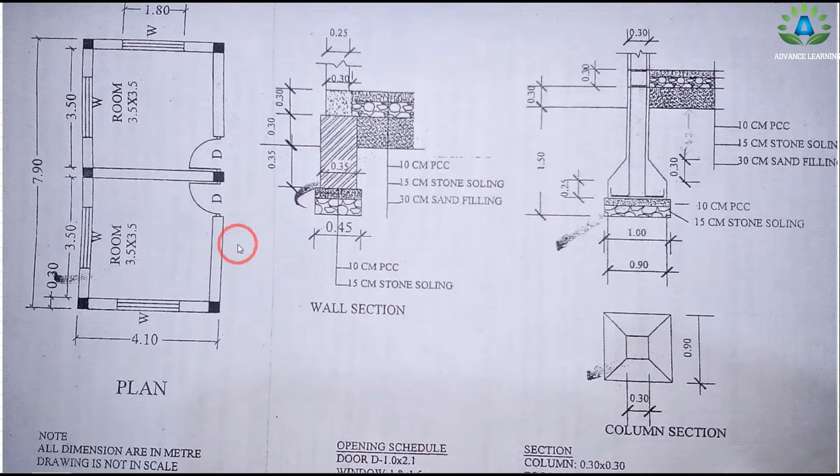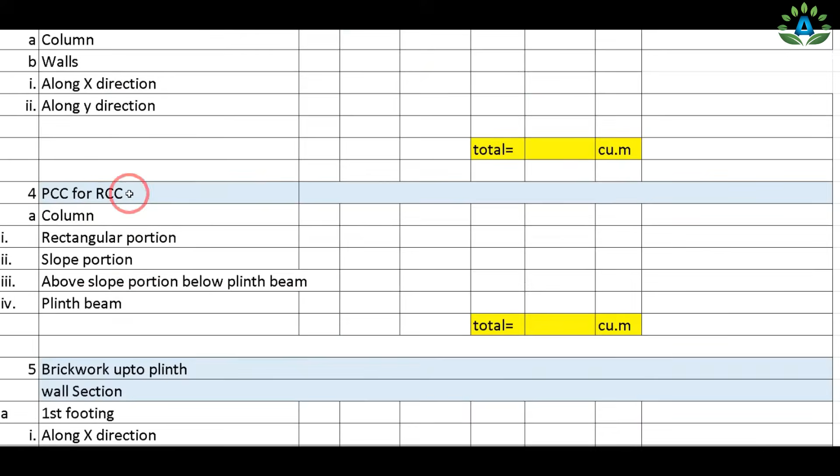And today we are going to calculate the following items: earthwork in excavation in the foundation, stone soling in the foundation, PCC for RCC, brickwork up to the plinth, and sand filling in the floor.

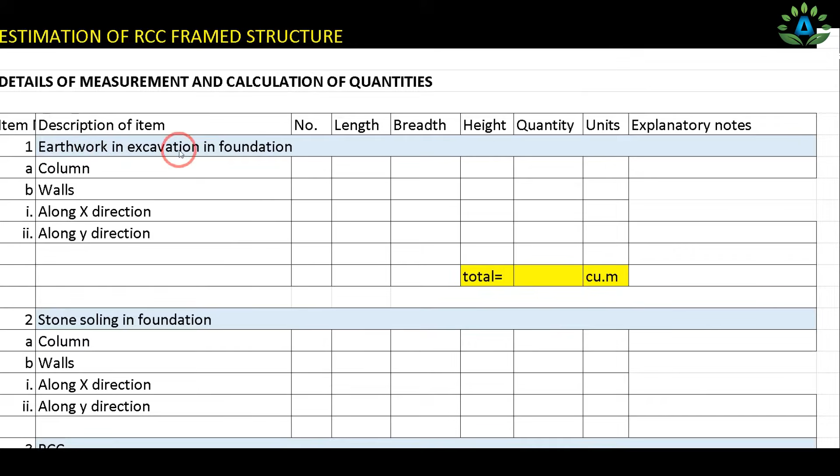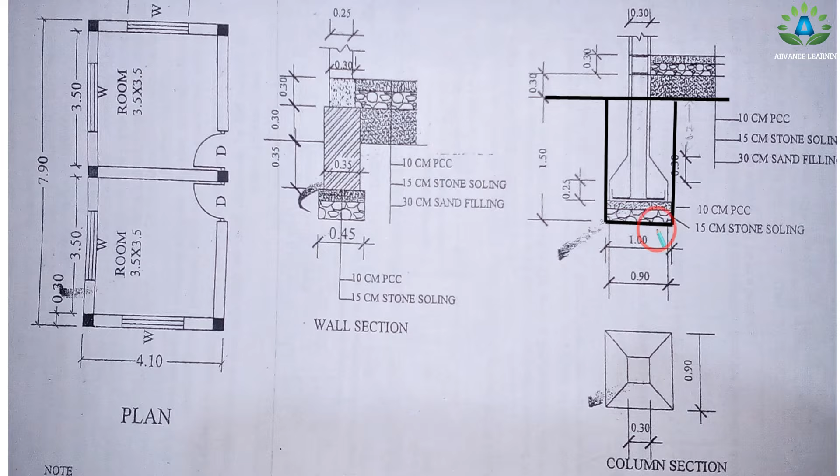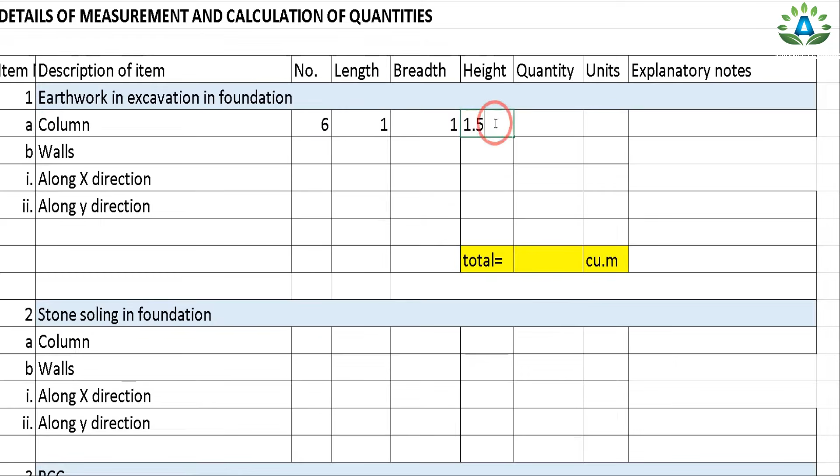So the first step is to calculate the earthwork in excavation in the foundation for the column. We need to see the plan. There are 6 number of these columns, and these columns are of width 1 meter, and we need to do the excavation up to the ground level. This is our ground level portion, and we have a total height of 1.5 meter up to the ground level. We need to do the excavation of 1 meter width. So the number is 6, the width is 1 meter and the length is also 1 meter, since it is a square column, and its height is 1.5 meter up to the ground level. So we have done the excavation of this 1 meter width column.

Now we need to do the excavation for the wall section. Our first step is to calculate the total center line between these two columns. We have a distance of 3.5 meter, and the column size is 0.3 meter. So the total center to center distance equals 3.5 plus 0.3 by 2, plus again 0.3 by 2, that equals 3.8 meter. Here also we will get 3.8 meter, but from this center to this center we will get a total center line of 4.1 minus 0.3 by 2, minus 0.3 by 2 again, that equals 3.8 meter.

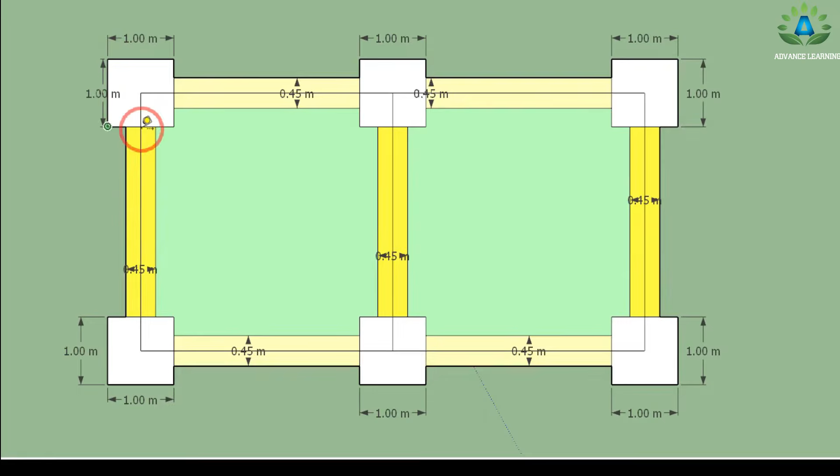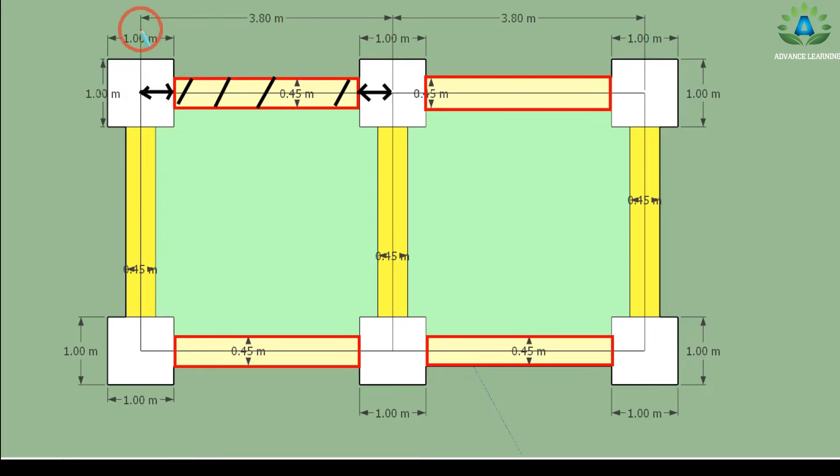Now we have already done the excavation for the column having width 1 meter and length 1 meter. So now we need to consider these walls, this wall, this wall and this wall. These walls are along the x direction, and we will consider the walls along the y direction in a separate topic. So firstly, this wall along the x direction. We have already calculated the total center line distance as 3.8 meter, but now we need to calculate the length from this side up to this side only. That is, in this center line of 3.8 meter we need to deduct this portion, that is half of this excavation width, 1 by 2, and again here also we have a width of 1 meter, and we need to deduct this small portion, that is deduct 2 number of 1 by 2, this portion and this portion.

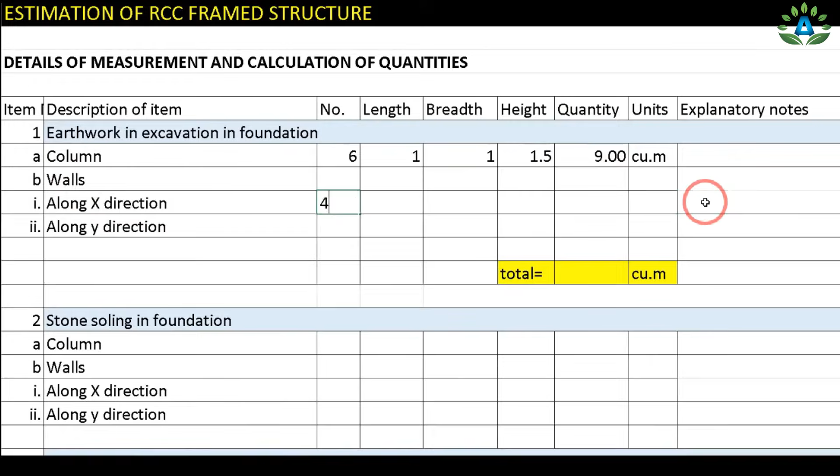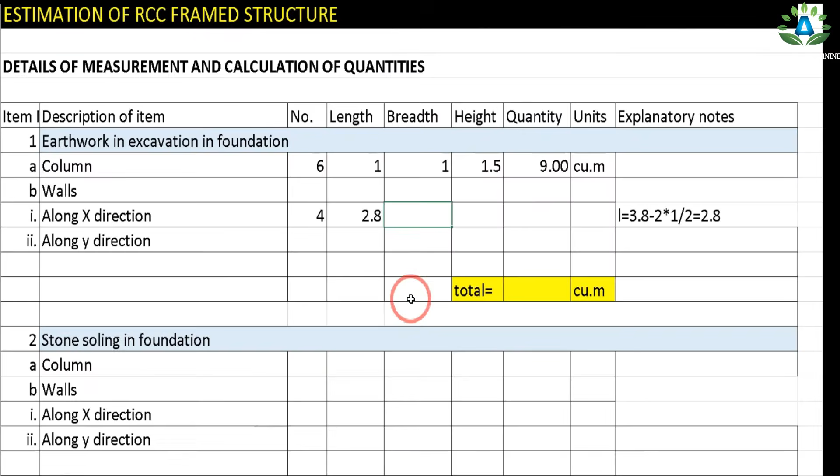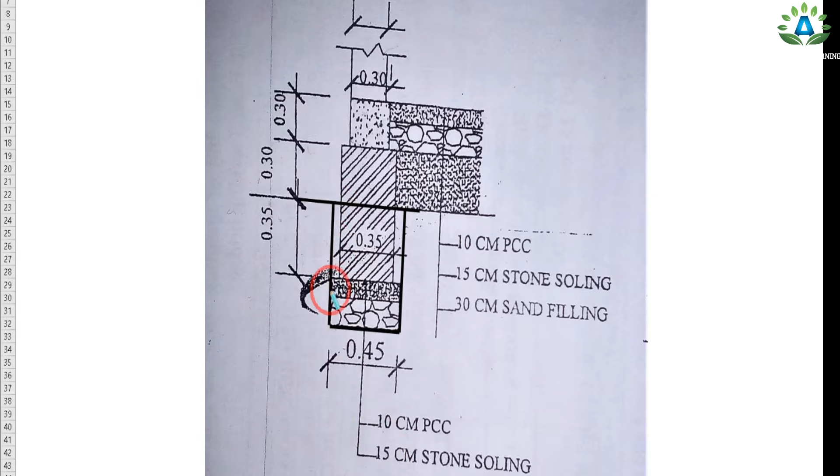We have 4 number of walls along the x direction having a width of 0.45 meter. For the walls along the x direction, the number equals 4, and its length equals the center line length, that is 3.8 meter. We need to deduct half of the foundation width of the column, 2 in number, so we will get 2.8 meter. So the length equals 2.8 meter, and the width equals 0.45. This is the section for the wall, so our width equals 0.45. The height of the excavation equals this portion plus this portion plus this portion, because this is our ground level, and the total height equals 0.35 plus this portion of 0.1 meter, and this portion of 0.15 meter. So the total height equals 0.6 meter.

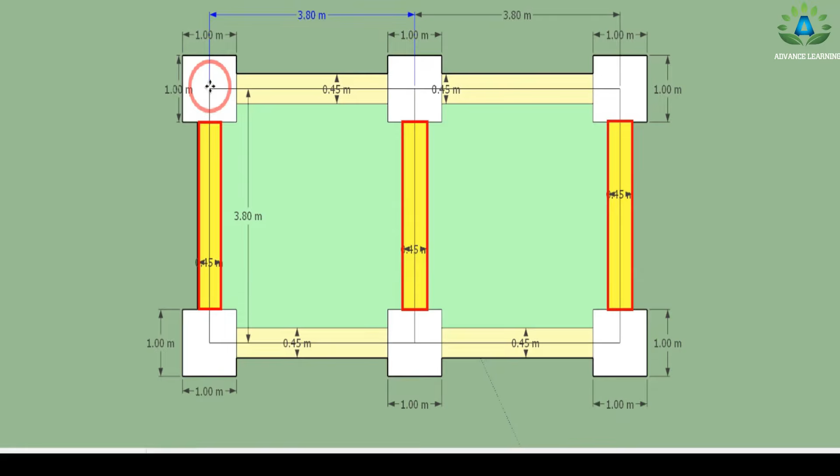Now we need to do the excavation for the wall along the y direction. In this y direction we have 3 number of walls having a width of 0.45, and we have already calculated the total center to center distance, that is 3.8 meter. In this center line length we need to deduct this portion, that is half of the width of this column, 1 by 2 from one side, and again deduct 1 by 2 from this side to get this portion length.

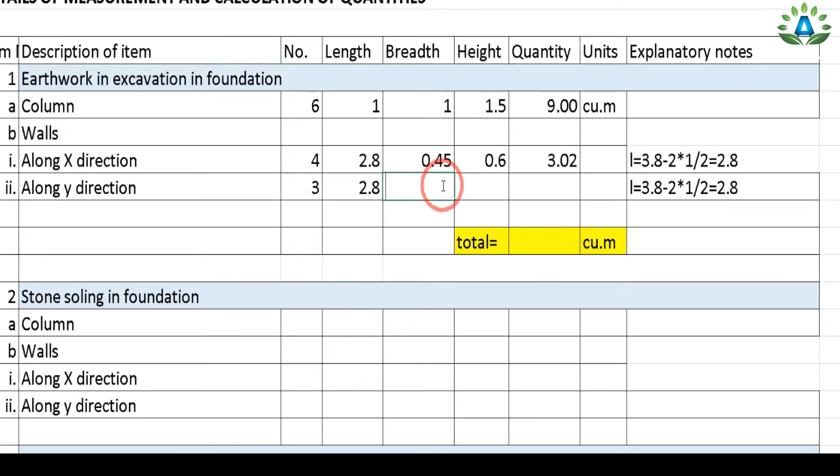Numbers are 3, having the length of center line length 3.8, minus we need to deduct 2 number of the column having the width of 1 by 2. So its length is equal to 2.8 meter, and it also has a width of 0.45, and the height is also the same, that is 0.6 meter.

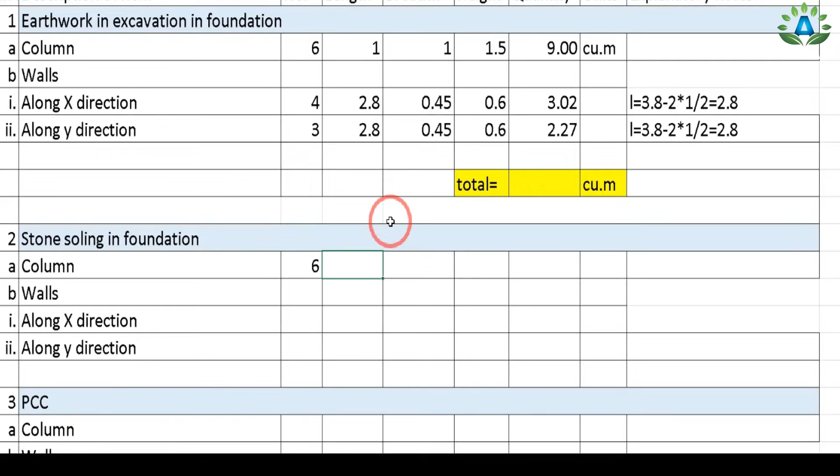Now we need to calculate the stone soling in the foundation, and always remember that we calculate the stone soling in meter square, so we don't write the height in the stone soling. So we have the stone soling in this portion, that is in 1 meter width. The columns number are same, that is 6 in number, and its length and breadth is same as above, that is the length of this column and the width is 1 meter.

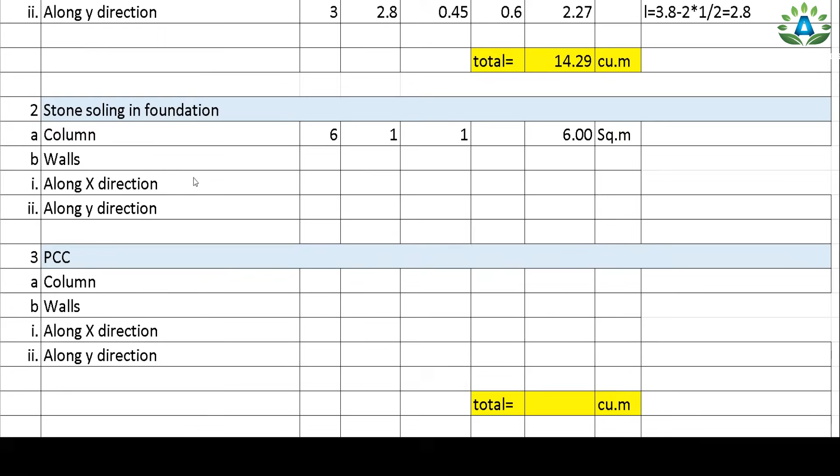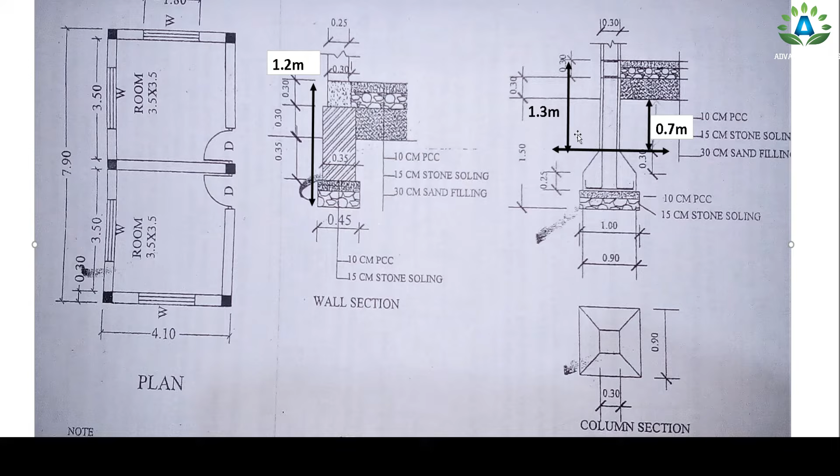So our next step is to calculate the stone soling in the foundation for the wall along the x and y direction, and for this we need to see our section. Here our stone soling is kept in this portion, that is 15 centimeter stone soling. This total height is equal to 1.2 meter from this plinth beam, that is 0.3 plus 0.3 plus 0.35, plus this small portion is 0.1 and this portion is 0.15 meter. So this height equals to 1.2 meter, and at the same height of 1.2 meter in this column, we will see that it has a width of 0.3 meter because this height is equal to 1.3 meter, and 1.2 meter will lie somewhere over here.

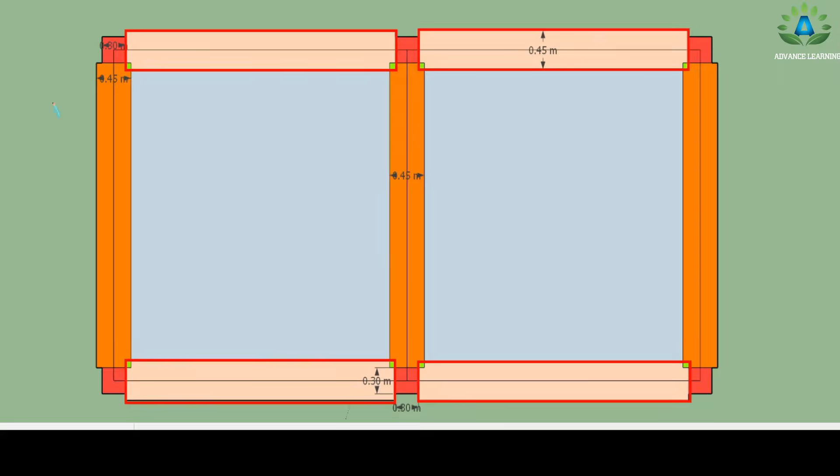So in this level it will have the width of 0.3 meter column. So our plan will look like this, that is in this column it will have 0.3 meter, whereas in this portion we will have 0.45 meter width. So our plan will look like this, and here we are going to calculate the x direction beam, that is this portion, this portion, this portion and this portion. So we have 4 number of these beams in x direction having the width of 0.45, but we need to calculate the length.

So here we have this center to center distance as 3.8 meter, and we need to deduct this half portion, that is 0.3/2 from one side and another 0.3 from one side. So our length is equal to 3.8 meter minus 2 number of the column having the width of 0.3/2, that is equal to 3.5 meter. So length is 3.5 and we don't need to write its height.

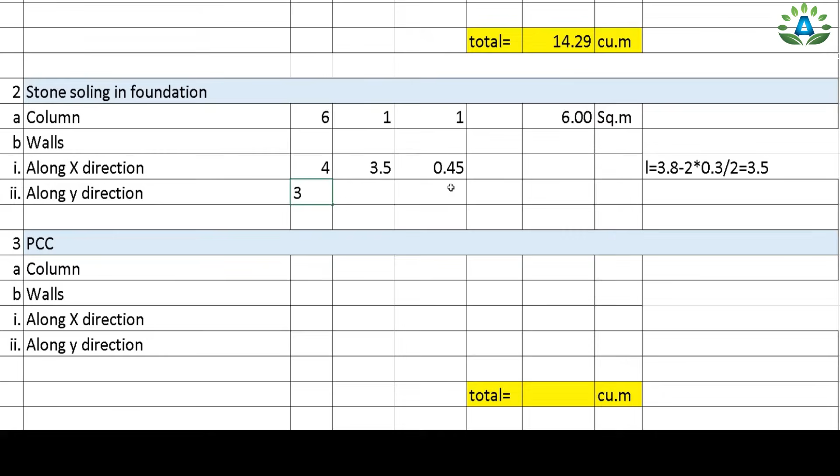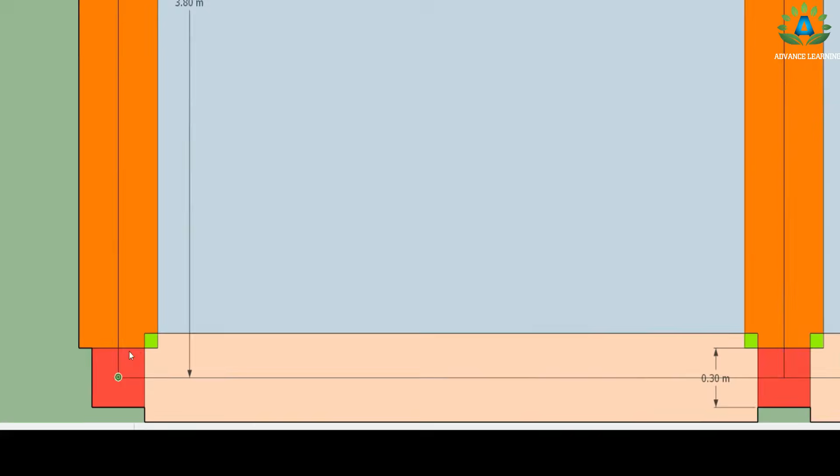Now we need to calculate the beam along the y direction. So here we have 3 number of these beams along the y direction, having the width of 0.45. So the number is 3 and width is 0.45, and we need to calculate its length. So here also the length will be the center to center distance, that is 3.8 minus 0.3/2 from this side and again minus 0.3 from this side. So the length will be equal to center line length 3.8 minus 2 into 0.3/2, that is equal to 3.5 meter, and no need to write its height.

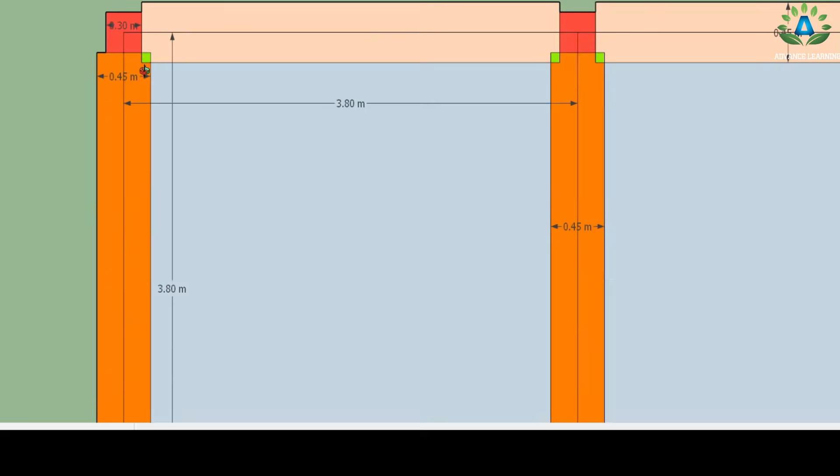So here we have done the soling in this portion, this portion, this portion and all these portions. But here we can see that this small portion is considered twice while doing the soling on this side as well as on this side. So we can see that the number of overlapped portions is 1, 2, 3, 4, 5, 6, 7 and 8. So the number of overlapped portions are 8, so they should be deducted.

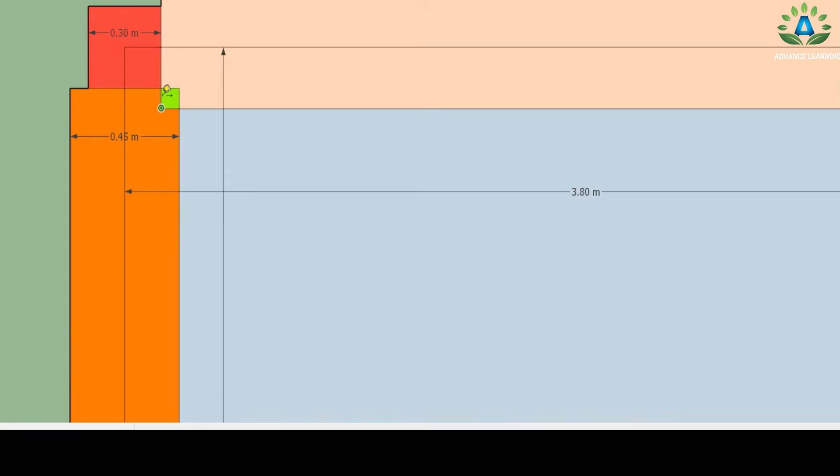And this length of this overlap portion is equal to 0.45 minus 0.3/2, that is equal to 0.075 from this side, and this width is also 0.075. So deduction is to be made, and number of deductions are 8 in number, and the length is equal to 0.075, that is 0.45 minus 0.3 meter wall by 2, and its width is also same, and no need to write its height. Now we need to do the PCC for these columns and the wall.

So we have 6 number of the column. PCC is done in this portion having the height of 0.1 meter and the width is 1 meter. So length and the breadth is 1 meter and its height is 0.1 meter.

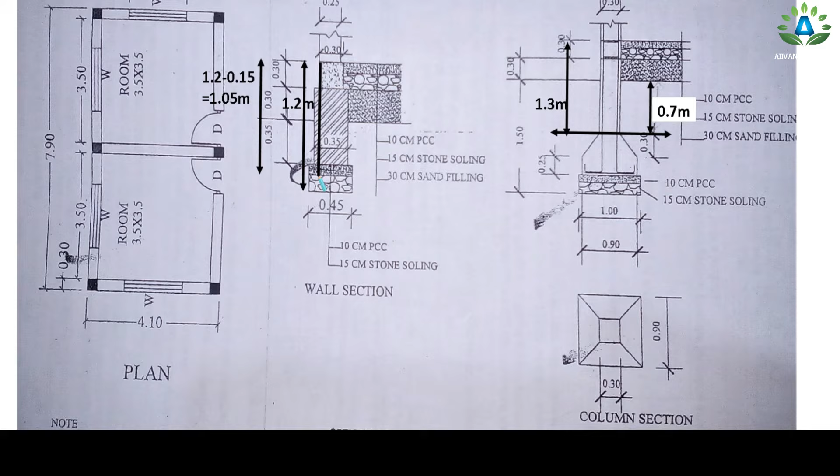Now we need to calculate the walls along the x direction. So here PCC is kept over this small portion having the height of 0.1 meter. So it means that our height from this portion up to this portion is 1.05 meter from this plinth beam, and at the same time we have this 1.05 meter somewhere over this portion, because this portion is 1.3 meter and 1.05 will lie somewhere over this portion.

So it means that for this column portion we have the width of 0.3 meter, whereas our wall section will have the width of 0.45 meter.

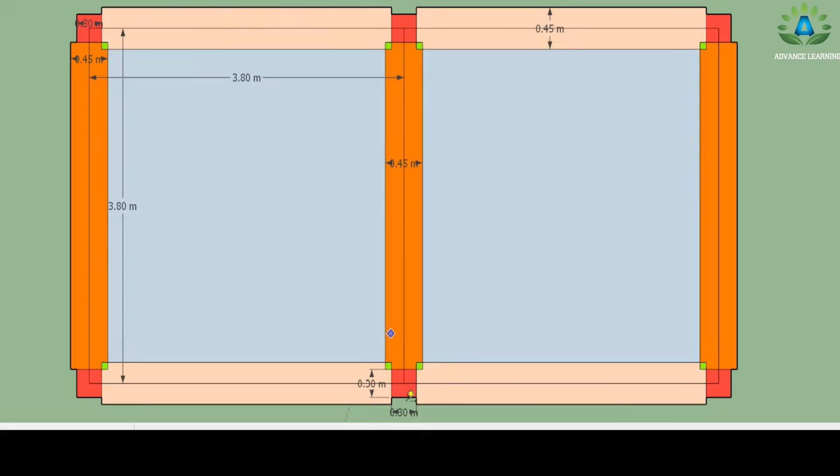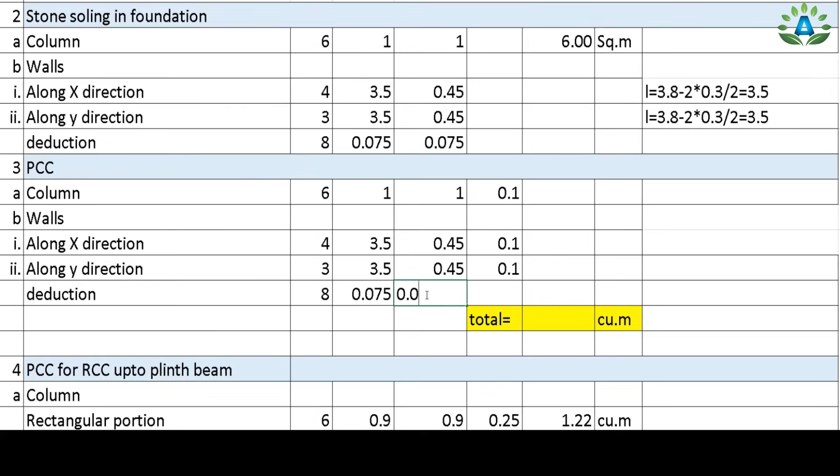Our plan will be the same as the soling portion: we need to deduct 8 number of these projections having a width of 0.075, with length and breadth also the same, only the height will be different. Since length and breadth can simply be copied, only the height differs. We have this PCC with a height of 0.1 meter for both, and we need to deduct 8 number of this overlapped portion having length of 0.075, width of 0.075, and height of 0.1 meter. Our next step is to calculate this PCC for the RCC up to the plinth beam.

Here is the section of the column, and we have this PCC for RCC in this portion. Here there is the reinforcement, and we do the PCC for this RCC portion. This portion is our plinth beam portion, that is 0.3 meter into 0.3 meter. We need to do the PCC for RCC for all these portions.

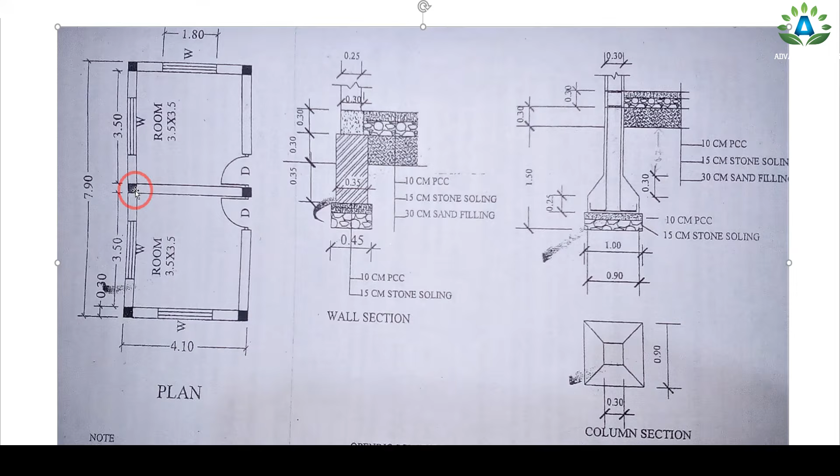Firstly, we have this rectangular portion, and above this there is a sloped portion, so we consider that as our slope portion. I've considered this as a rectangular portion for the column. We have these columns, 6 in number, with a length of 0.9 meter. Since it is a square column, the length and breadth are both 0.9 meter, and it has a height of 0.25 meter.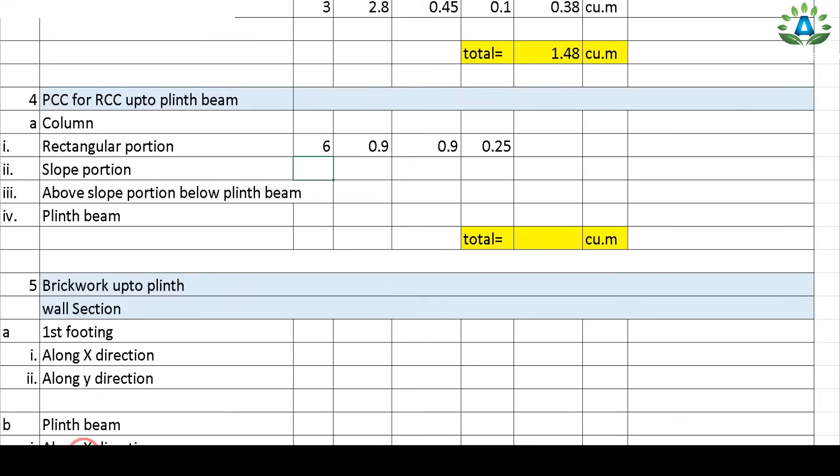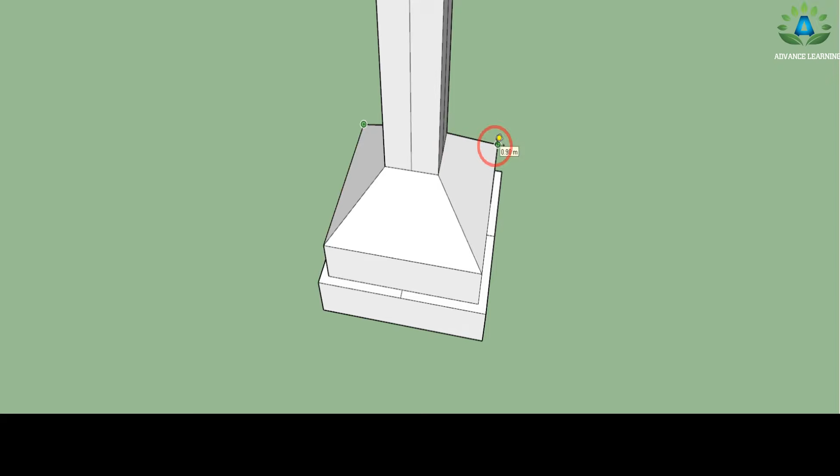Next is our slope portion, considering from this point up to this point. At the base it has length and breadth of 0.9 meter, whereas at the top it has length and breadth of 0.3 meter. I'll consider A1 for the bottom portion, that is 0.9 into 0.9, so the area for the bottom equals 0.81. Similarly, I'll consider A2, the area for the upper portion, which is 0.3 into 0.3, equal to 0.09.

For this area, I'll take the average of A1 and A2: 0.81 plus 0.09 divided by 2, since it's a slope portion. Now we need its height, because volume equals area into height. The height of the slope portion is 0.3 meter, so we multiply by 0.3. Since the column is 6 in number, this slope portion also has a number of 6, and we can easily calculate its quantity.

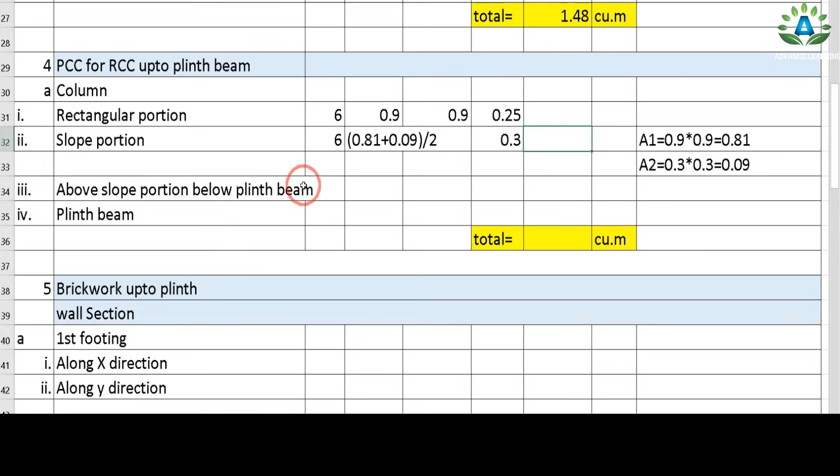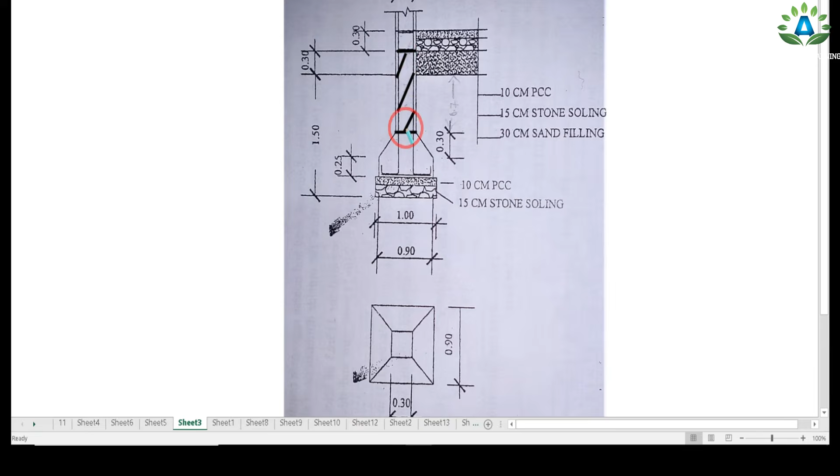Now I'll consider the portion above the slope and below the plinth beam, from this side up to this side. This is our plinth beam, and we're considering this portion, which has a width of 0.3 meter. Since it's a square column, length and breadth equal 0.3 meter, and we need to calculate its height. The total portion here is 0.3 and this is 1.5; we need to deduct 0.15 and 0.1, with this portion having a height of 0.25 and this portion 0.3.

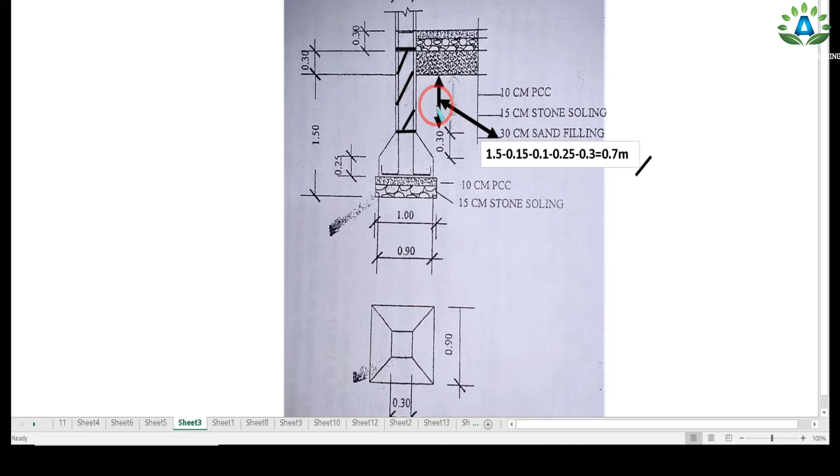We get the total height from this side to this side as 0.7 meter, but we need the total height from this side to this side. This portion has a height of 0.3 and this portion 0.7, so the total height equals 0.7 plus 0.3, which is 1 meter. So its height equals 1 meter, with 6 in number, and this portion has a width and length of 0.3 meter since it's a square column.

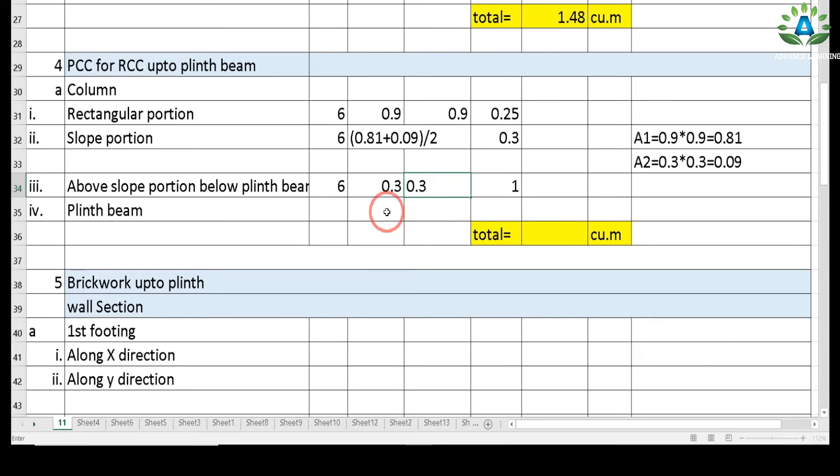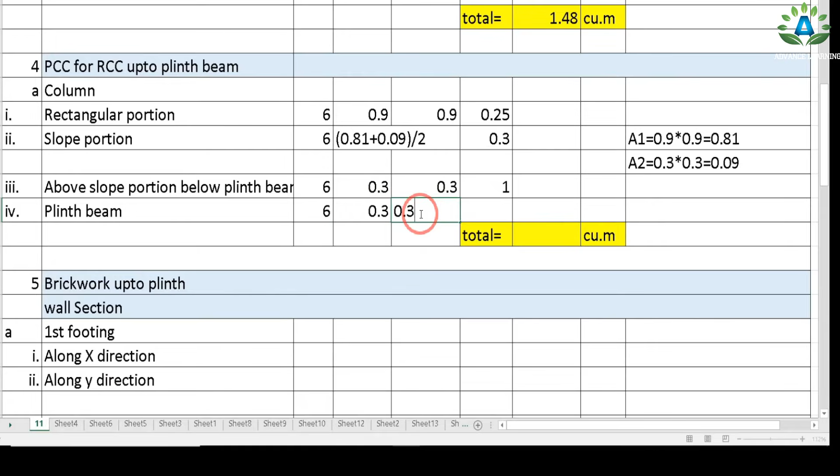Now we need to calculate this plinth beam portion, the small portion, which has a length of 0.3, width of 0.3, and height of 0.3 meter, with 6 number of columns. Our next step is to calculate the brickwork up to the plinth for the wall section.

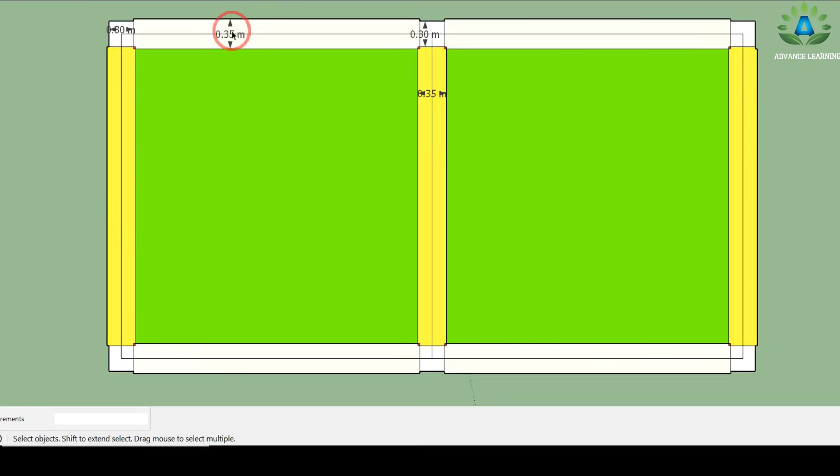So our plan will look like this: our column will have a width of 0.3 meter, whereas our beam portion will have a width of 0.35 meter. We don't need to do the brickwork for these column portions because we have already done the PCC for the RCC in this portion.

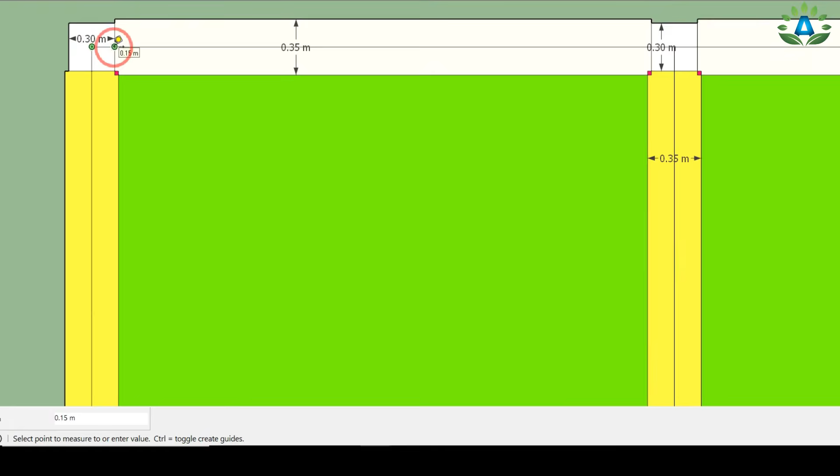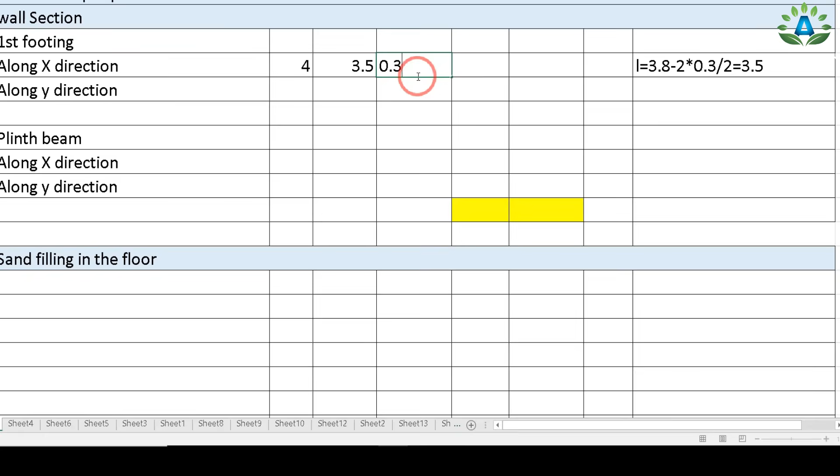So we are going to do the brickwork for the X and Y direction beams, starting with the X direction beam. We have already calculated the total center to center distance as 3.8 meter, and we need to deduct half portion, that is 0.3/2 from one side and another 0.3/2 from the other side. Along the X direction we have 4 of these beams, 2 here and 2 here, and the length equals center distance 3.8 meter minus 2 times the column width of 0.3/2, giving us 3.5 meter. Its width is 0.35 and height is 0.65.

Now we need to calculate the brickwork for the beams along the Y direction. We have 3 of these beams, and the length equals center to center distance, 3.8 meter, minus 2 times the column width of 0.3/2. So length equals 3.5 meter, width is the same as above, 0.35, and height is also 0.65. Now we need to do the deduction portions.

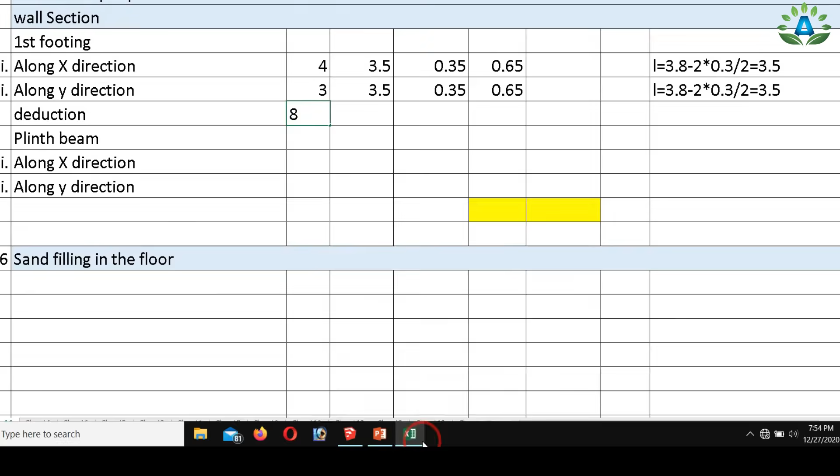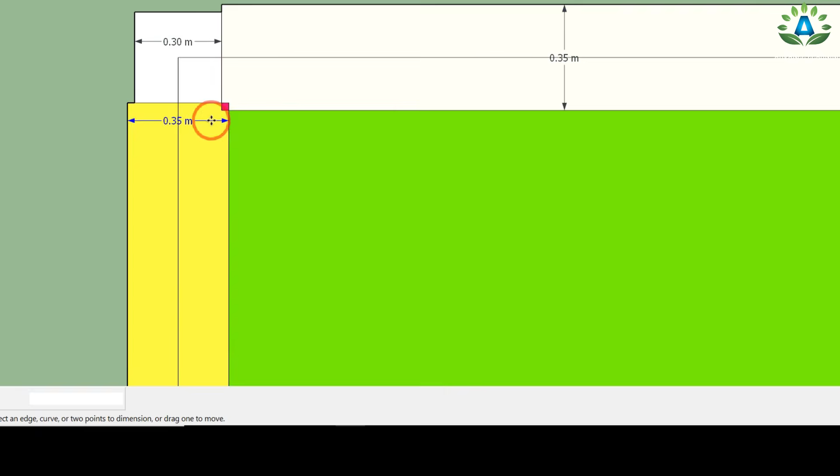We have 8 of these portions that should be deducted, so number equals 8. Now we need to calculate the length and breadth of the deductions. We have a width of 0.35 in this brickwork portion, whereas the column at this level has a width of 0.3, so we need to calculate the length of this overlap portion. This small portion is obviously 0.35 minus 0.3 divided by 2, which equals 0.025.

So the length is 0.025, the width is also 0.025, and the height is the same as above, 0.65 meter, and we need to deduct this portion. So here we have completed the brickwork in this portion.

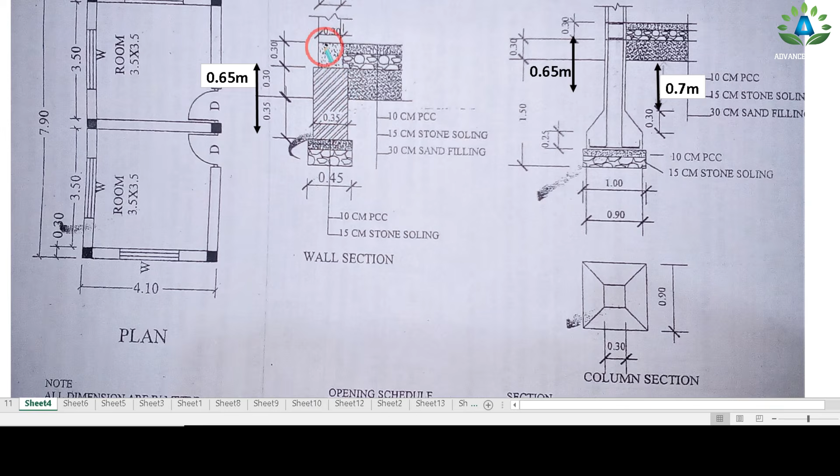Now we need to do the brickwork in this small plinth beam portion. Here we have a width of 0.3, and in this portion of the plinth beam of the column we also have a width of 0.3, so both are 0.3 meter. Its plan will be the same as the given plan, since both portions are 0.3 meter, so there is no overlapped portion, and we can easily calculate the length. This length is already given as 3.5 meter, with a width of 0.3 meter.

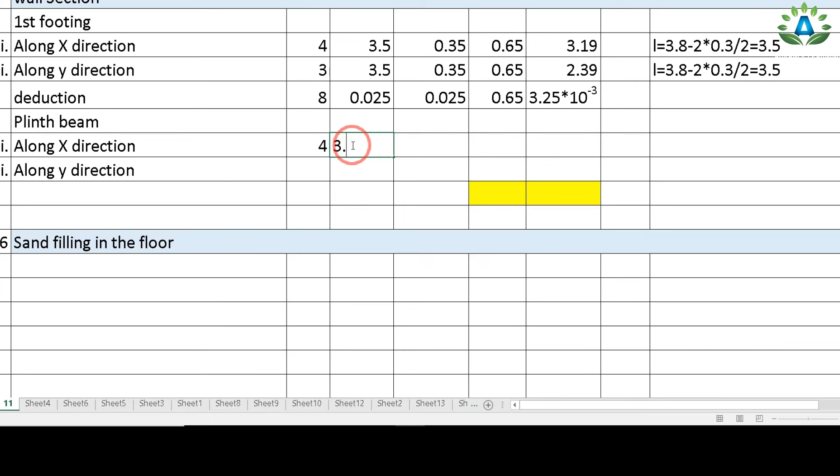In the X direction we have these beams, 4 in number. So for the plinth beam in X direction, the number equals 4, the length equals 3.5 meter, the width is 0.3 meter, and it has a height of 0.3 meter.

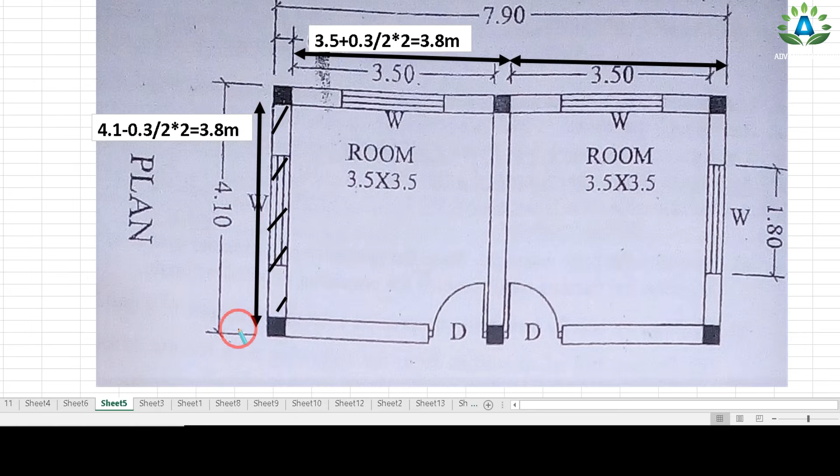Similarly in the Y direction we have 3 of these beams. So number equals 3, and its length equals the inner to inner portion, because we don't do the brickwork for those portions. The length equals the outer length 4.1 minus 2 times 0.3, giving 3.5 meter, with width also 0.3 and height also 0.3.

So our last step is to calculate the sand filling on the floor, and for this we need to see the section, since our sand filling is kept in these inner portions. First we need to see the section between these two portions. When we look at the section on this side, we get the section of the wall, and here also we get the section of the wall. We get this type of section on both sides of the room.

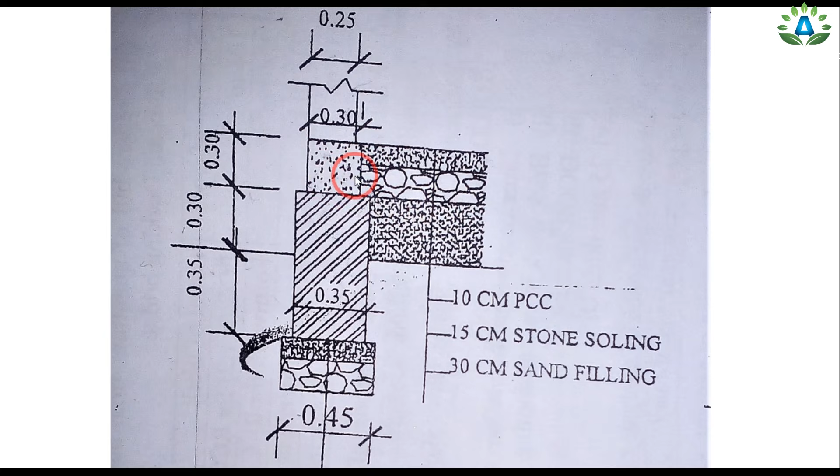So here I have made this type of section on both sides of the room. This portion is our plinth beam having a width of 0.3 and 0.3 height, on both sides. Similarly, I have made this portion with a width of 0.35, and it has a height of 0.3 plus 0.35.

So I need to make this portion on the inner side. This is our 10 centimeter PCC that is given here. The next is our 15 centimeter stone soling, that is 0.15 meter stone soling on this side.

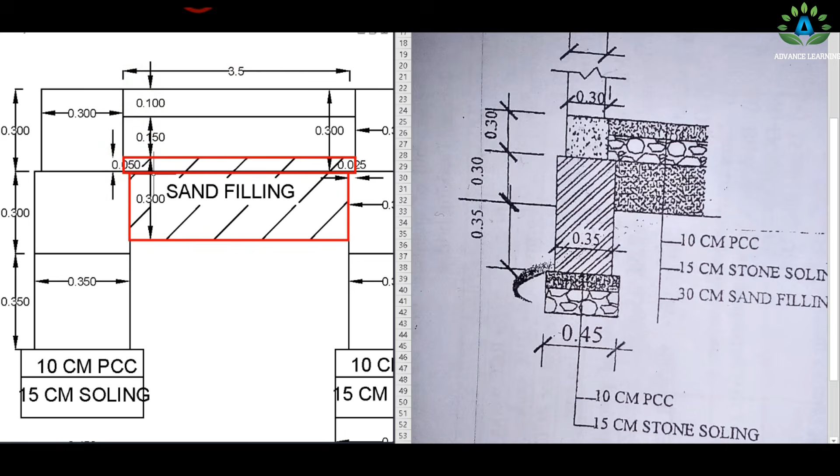Now we can see we need to do this sand filling of 30 centimeter height, that is 0.3 meter. This sand filling portion lies on this part as well as this part. We have the inner dimension of this room as 3.5 meter.

But in this section we can see our sand filling is kept only in this portion. When we make this sand filling portion with actual height, it will lie on this portion as well as this portion. So firstly, sand filling for this upper portion.

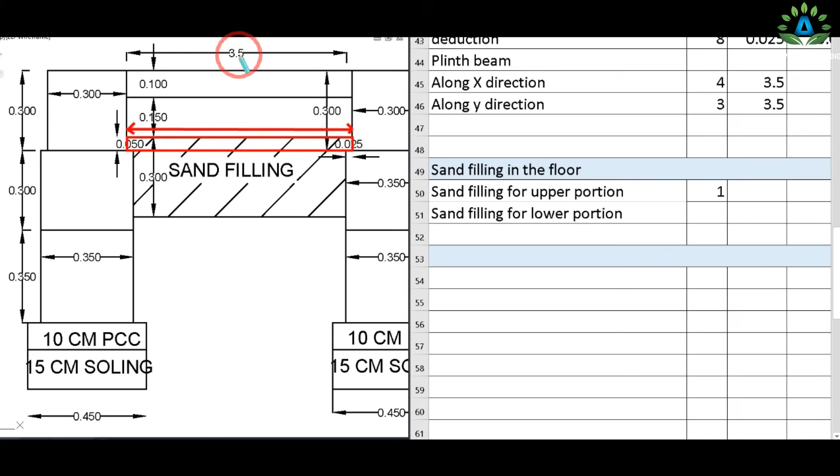So we have this sand filling for upper portion, 1 in number, and its length will be from this side up to this side. We already have this length, that is 3.5 meter, the inner dimension of this room. So the length is 3.5 meter, and to calculate the width we need to see the section from this side.

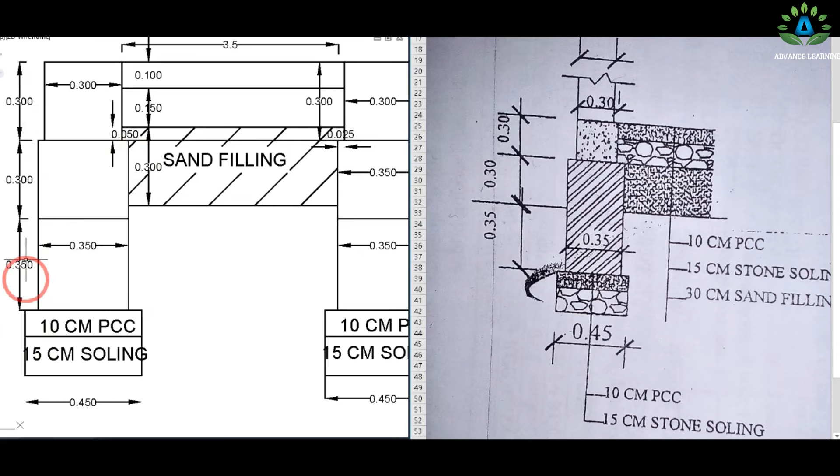While looking at the section from this side, here also we will get the section of this wall, and here also the section of the wall, with inner dimension 3.5 meter. So here also we get this same type of section, and we need to do the sand filling on this portion. The width is also 3.5 meter, so I'll write the width as 3.5 meter.

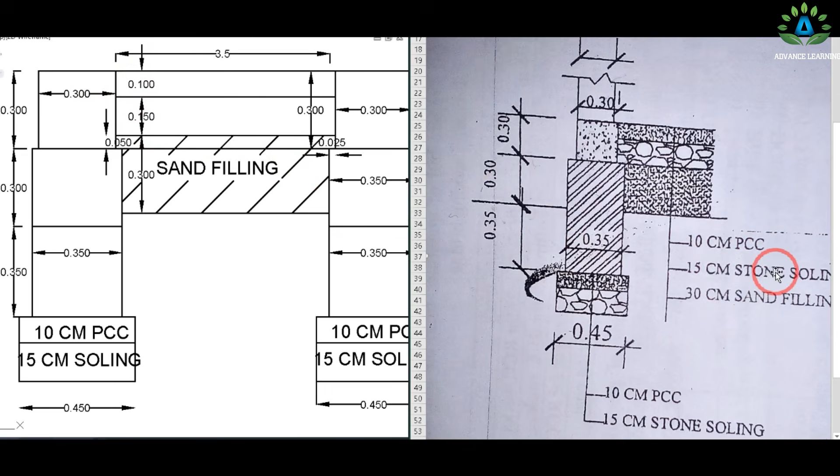Now we need to consider the height. We have a height of 0.3 meter plinth beam, a height of 10 centimeter PCC (0.1), and a height of 0.15 meter stone soling. So this small portion height will be 0.3 minus 0.1 minus 0.15, which equals 0.05 meter. So I can write the height equals to 0.3 meter plinth beam minus 0.1 meter PCC minus 0.15 soling, so the height equals 0.05 meter.

Now we need to do the sand filling for this lower portion, considering this portion. It means we need to consider the length only from this side up to this side. So the length equals 3.5 meter, and we need to deduct this portion from this side and this portion from this side. This small portion length will be equals to 0.35 brickwork portion and 0.3 meter, so this portion will be 0.35 minus 0.3 by 2, that equals 0.025.

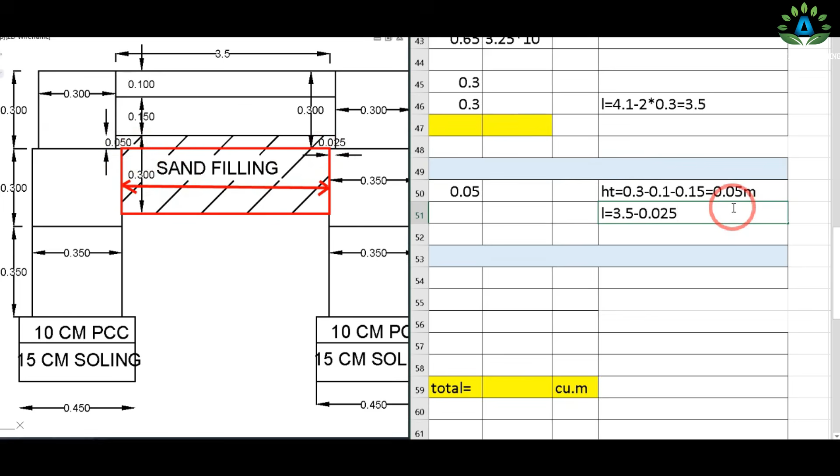So I will consider the length equal to inner dimension of this room, 3.5 meter, minus this projection of 0.025 into 2, that equals 3.45 meter. So the number equals 1, and this length is 3.45. Now we need to calculate its width. We will have this same type of section, that is, the length will be equal to its breadth, so I will simply write the breadth equals 3.45, and its height is to be calculated.

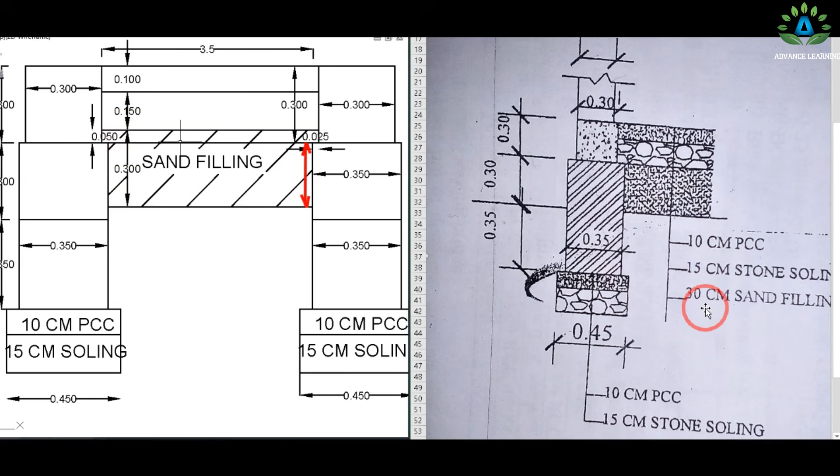So we need the height from this portion up to this portion only. We have this total portion 0.3 meter, that is 30 centimeter sand filling, and we have already done this portion, that is 0.05 already considered. So this height equals 0.3 minus 0.05. I will write the height equals our sand filling portion 0.3 minus this portion already considered, minus 0.05, so we get 0.25 meter height.

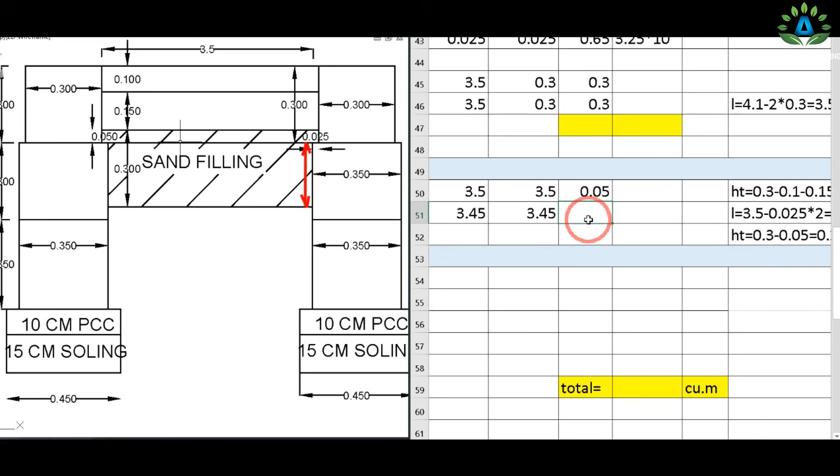So now we have already done the sand filling in this portion of this room. Now we need to do the sand filling in this room. All the number, length and breadth will be same as before. So for this second room, we can easily copy all these number, length, breadth and height for this sand filling portion, and we can easily calculate all the quantities.

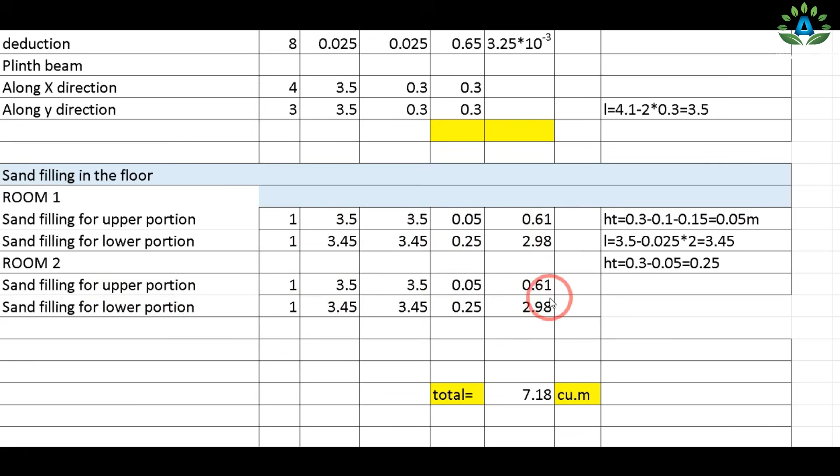So in this way we have done the estimation of this RCC frame structure.